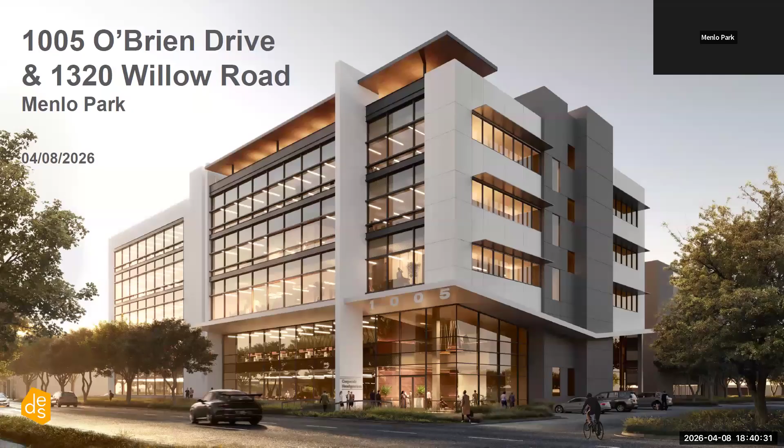Okay, next is item E2, receive an update and provide feedback on the draft Environmental Impact Report, EIR, for the 1005 O'Brien Drive and 1320 Willow Road development project. The applicant will present. For the record, there are two corrections to be made in the staff report: one, there are no bike facilities along O'Brien, and two, there will be 48 long-term bicycle parking instead of 38.

Sorry, does that mean in the plan? In the plan that there are no bike facilities? I know, but I'm sorry, can you repeat? So in the plan it shows 38 long-term bicycle parking, but there will be 48. It's planned for 48. To clarify, right now it's identified in the EIR as part of the staff report that there is, as background, bike facility on O'Brien, and that's a misprint. So there are no existing bicycle facilities. That's what I'm asking. So item one, is that existing, okay? That's item one, right? Correct, that there are none, and item two says the plan is for 48.

Thanks for clarifying. So the applicant will present.

And with me tonight are Dawn, Lauren, and Kenny with DES Architects. And on the phone or by Zoom, we have Elizabeth with Kimley Horn to answer your questions. We're excited to bring this project to you. And as an avid cyclist, I want to thank you for all of your work helping to make our streets more complete. With that, I'll turn it over to Dawn with DES.

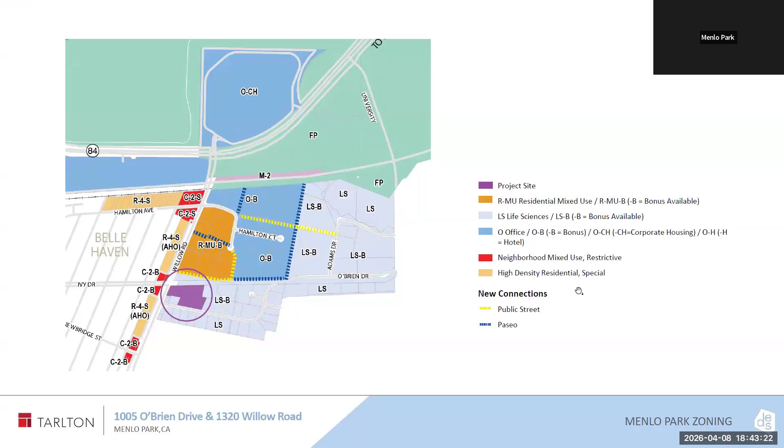There are 3 existing low-rise industrial buildings on the project, on the site right now, and 3 separate parcels.

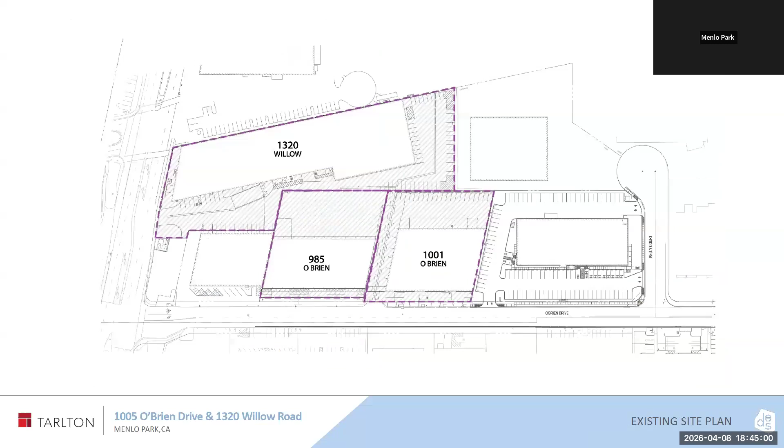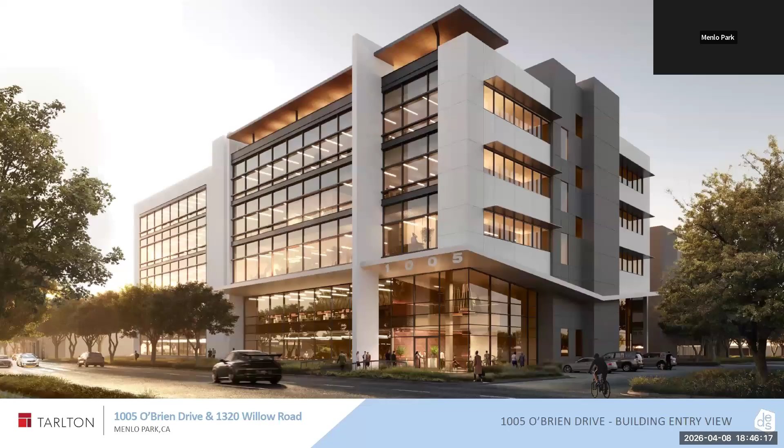So this is a view of the 1005 O'Brien project. You can see it's transformational in terms of the streetscape. We've got lobbies fronting the street with generous entry plazas, and then a nicely landscaped frontage with new pedestrian and bicycle facilities. If we go to the next slide, you can see in more detail in plan what I just described.

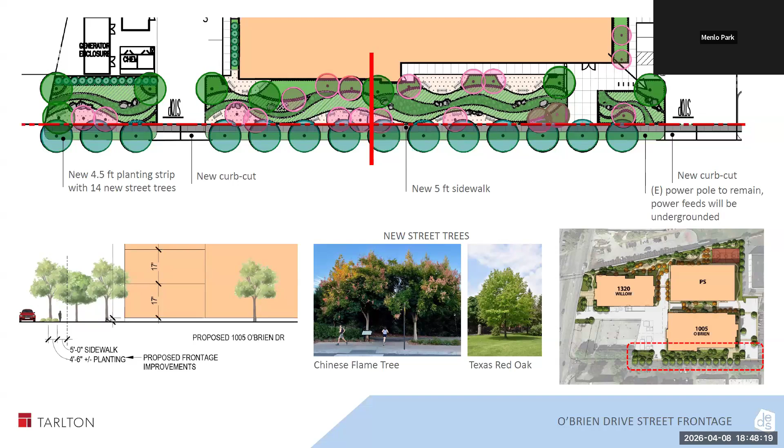So then the next slide, we have a plan. So you can kind of see that in plan. On the right-hand side you'll see the entry drive, and then at the corner you see the entry plaza, and then the generous landscape frontage, which is between 26 and 30 feet setback from the property line. We're showing a 5-foot bike lane, a class 2 bike lane with 3-foot stripe separation along the street. We've got a 4.5-foot planting strip and a 5-foot sidewalk facility. The power poles will remain along the street, but the power from the poles is undergrounded to the building. They do serve the project across the street as well, so the poles have to remain. And then we have a couple of different tree species there for more interest, really significantly trying to improve the pedestrian experience along the frontage.

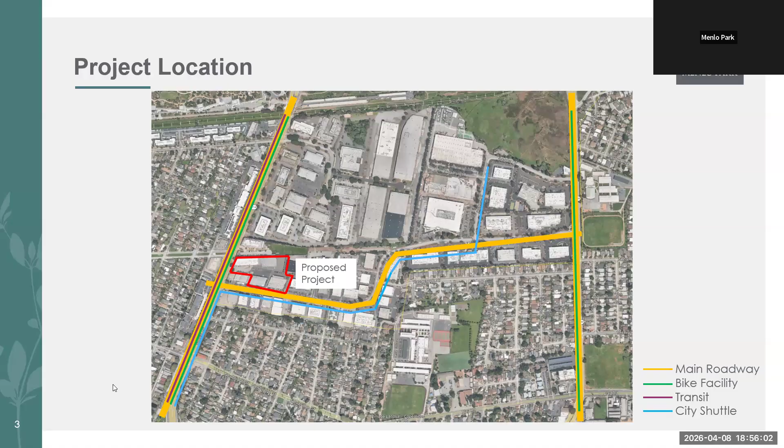The project will involve demolishing 3 existing buildings and constructing 2 new R&D buildings and a new parking garage. Open space will be scattered around the project site, and again there will be both long-term and short-term bicycle parking provided.

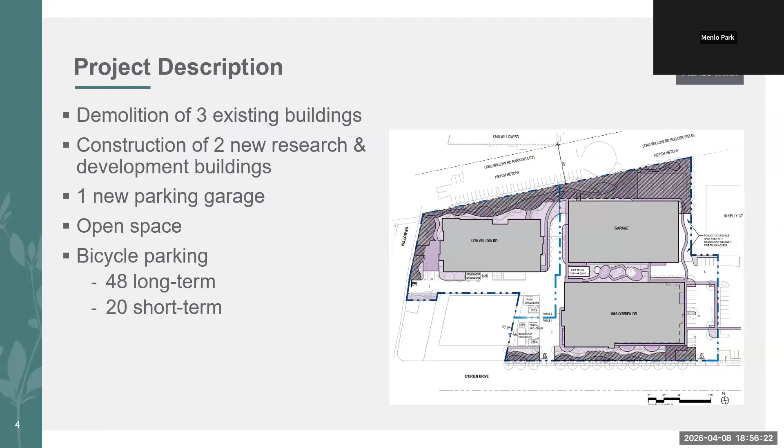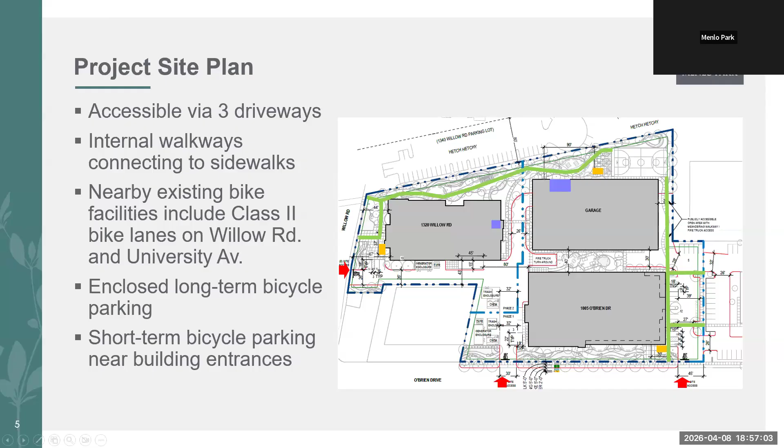The site will be accessible through 3 main driveways, 1 on Willow Road and 2 on O'Brien Drive, shown in red arrows. There will also be internal walkways that connect to the sidewalks on Willow Road, as well as new sidewalks on O'Brien Drive, with some internal walkways shown in green. There will also be 2 enclosed long-term bicycle parking areas shown in purple, and 3 short-term bicycle parking areas in yellow, located near the entrances of the buildings.

Since the implementation of SB 743 in 2020, vehicle miles traveled is now the standard for CEQA transportation analysis. So that is looking at the total amount of driving that a project could generate. And CEQA analysis also assesses impacts looking at transit, pedestrian, and bicycle travel as well. And while it is not a CEQA requirement, this project also evaluated the level of service just for informational purposes.

The project is estimated to generate 19 vehicle miles traveled per employee, which is over the regional average of 15.9. The city's threshold is 15% below the regional average, which is 13.6, meaning the project is exceeding the city's threshold by 28.4%.

In addition, C/CAG requires a 35% trip reduction for a project that generates over 100 daily vehicle trips. So in summary, the project will require mitigation under CEQA, and it needs to reduce trips by at least 35% to be in compliance with city as well as C/CAG requirements.

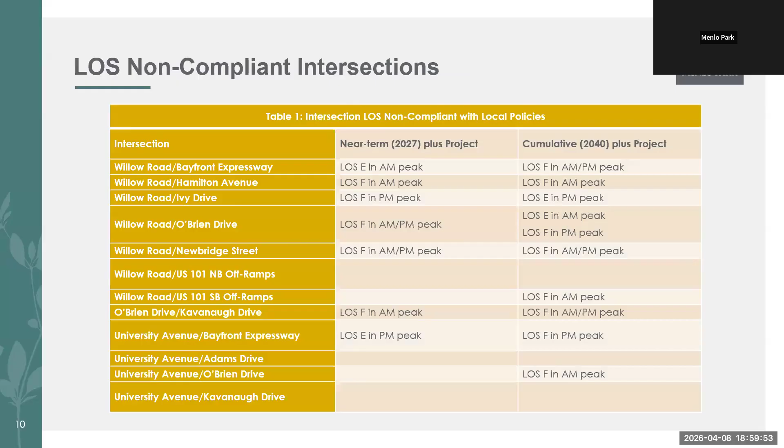We're currently in the draft EIR 40-day review period, which ends on May 18th. The Planning Commission public hearing is scheduled for May 4th. Written comments must be submitted no later than 5:30 on May 18th. A summary of recommendations today will be included in the staff report to the Planning Commission. After completing the pilot as directed by City Council, the process will also be provided to Council as an informational item.

This concludes our presentation, and we can answer any questions you have.

Okay, so now we can take clarifying commission questions. Who wants to start? Go. I did have a few.

Can you help us understand how many people work in the existing 3 buildings on the site, and how many people are projected to work in the buildings you are planning to build?

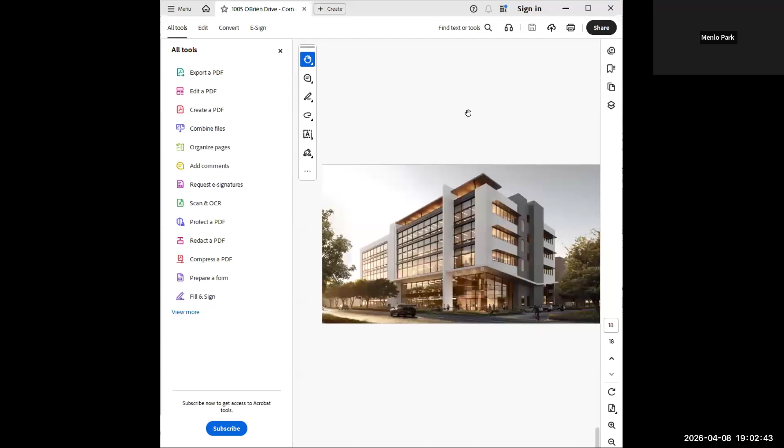Just a sec, sorry. I think you said that the 6.5 level parking garage had 194 spaces. Is that what you said? Pardon? I'm sorry, something like that, or it was just a ballpark. I'm just trying to understand.

I just wanted to make sure there were no surface parking stalls before I give you the number. I think it's 520 spaces, let me get to that page.

I may be able to answer that. When the parking garage is complete, there'd be 497 spaces, and then there are 23 surface parking spots, so total for the site at 520. Thank you very much for that.

And we were phasing the garage, so we're not going to overbuild it by phase. We would build what we needed for the first building and then add to the garage for the second building. Oh, I see, that's interesting. Okay, thanks for clarifying that.

A few more clarifying questions. I know in the staff report it was discussing the total square footage of the whole site, and I think over 30,000 square feet was public space. I think if this is actually perfect, thank you for putting the slide up. I have some confusion around what the public space is.

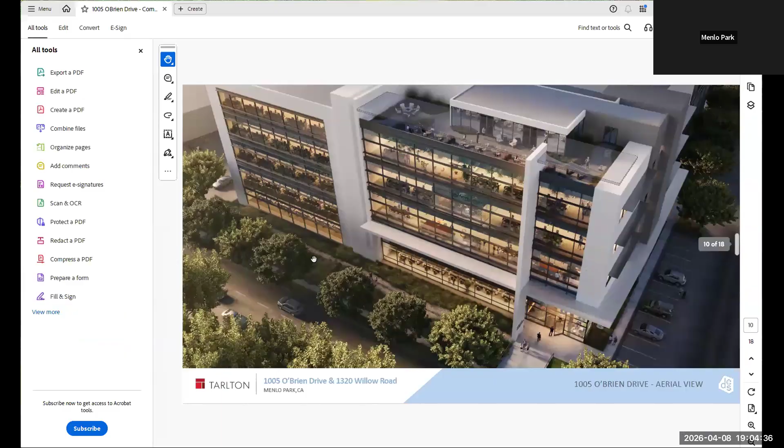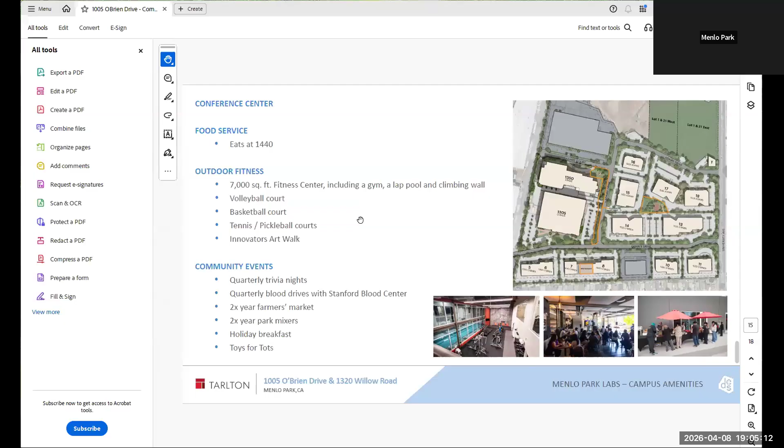Through the chair, I can answer this one as well. I have the plans in front of me. So as part of the LS zoning district, a portion of the site is required to be open space, and then a portion of that is required to be publicly accessible open space, meaning anybody in the public can use it. There end up being public access easements over that land. So the majority of the publicly accessible open space is...

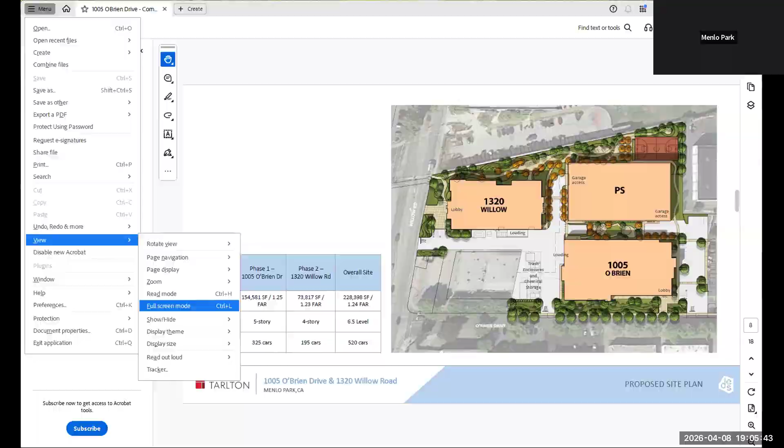...along Willow Road. You see at the north side, there's that meandering path, you can kind of see at the top here. The majority of that will be publicly accessible all the way over to the sports court from Willow Road. And then there's a little bit of publicly accessible open space along O'Brien Drive.

Okay, this is an adjacent clarifying question. To clarify around the existing state of the bike ped infrastructure and what it will be post-project: on the Willow side, there is a sidewalk and a Class 2 bike lane, and that remains the same, correct?

On the O'Brien side, there's currently no sidewalk — just a curb and then a paved surface all the way to the building. There's no defined sidewalk at the moment, and a sidewalk will be installed.

And then there's no bike striping or any sort of bike lane there, but it will be added. Yeah, there is adequate street width to add the bicycle lane, which would be the 5 feet plus the 3 feet of hatched separation — so it's striping with a 3 feet addition, not protected.

Got you, like on Santa Cruz. Yep. So to note, we would like to look at O'Brien more comprehensively. It is unlikely that this project itself during construction is going to bring on bike lanes, because then it would be piecemeal. There could likely be a bigger conversation on how to bring that facility along O'Brien, not just specific to this project.

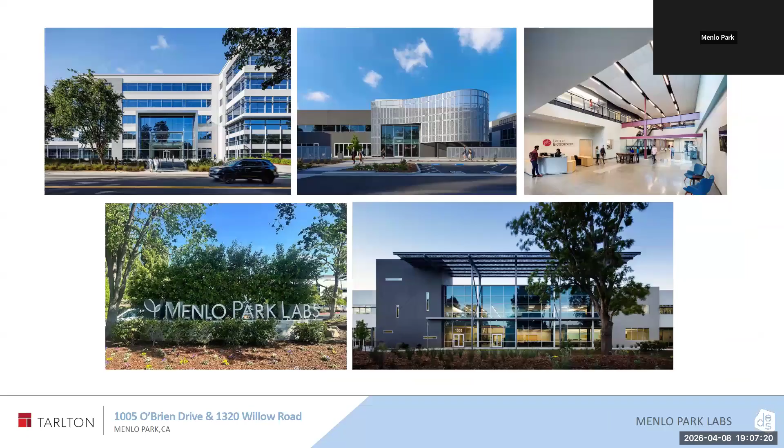I see, thank you for clarifying that. So currently, to the right of what we're seeing, because the campus extends, there aren't bike lanes on O'Brien at all, right now.

Okay, if we just look at the plan for a second — can we go back to the overall site plan. So the portion of open space along the top of the parking garage at 1320 Willow, where the sport courts are, that's the publicly accessible open space. The pieces that weave through between the buildings are not dedicated to the public.

A final clarifying question on exactly that portion of the site — what is that there? Is that a road between your site and what's above it on the slide? I believe that's Hetch Hetchy, where that goes across the top. So that is a parking area off-site from us.

Okay, but can someone drive down that? Is that a road? No, it's not a road — it's Mid-Penn High School's car park. Okay, I'm just trying to understand that. Thank you, I'll just see if I've got any other questions there.

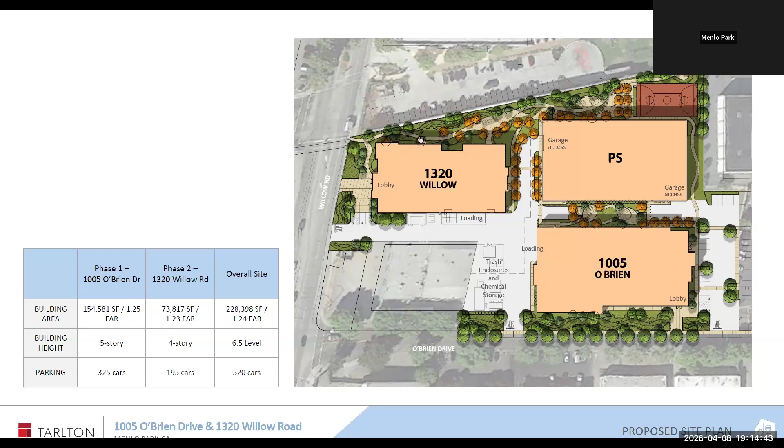I think that's really all I had. Okay, I have a couple of clarifying questions. I'm trying to sort these into clarifying versus feedback. On this slide, there's a walking path on the top part of the site, which I think, when you showed the map of bike access facilities, one of them was in the parking garage. I could imagine as a cyclist it might be nice to bike up Willow, since it has the protected bike lane as far as possible, and then take this walking path across.

So will that be accessible to bikes? Right now we're showing about a 5-foot wide path there, but that's something we could definitely consider.

And then the other question I have is about the e-bike share. I know the range is somewhat limited for that e-bike share. I think it's limited basically to the campus itself. Is that true? I don't think so. Okay, because I tried to take it to that Starbucks and it was out of range. So help me understand the issue, because this is very interesting to me and disturbing. The purpose of these bikes is to get to the Starbucks and back. So if it doesn't work, I will double check that.

But it's possible that it's not working properly, right? I have my own bike, so I don't take the shared bikes, I don't know. I tried, I just looked at the map, so I might not have looked carefully enough. But I just wanted to mention it.

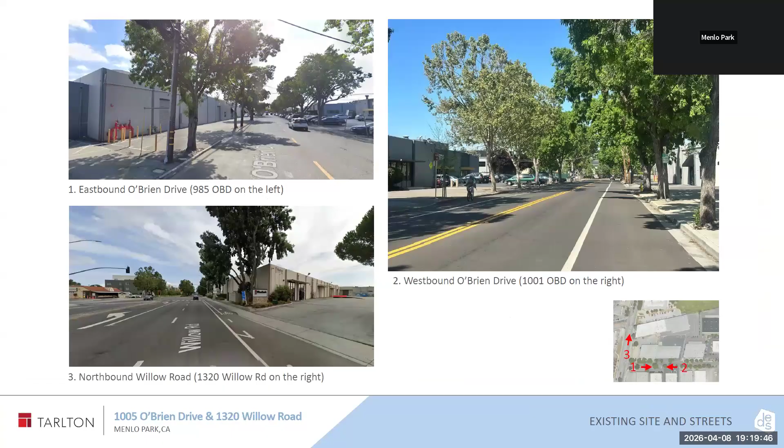And finally, in the staff report it talks about sidewalk gaps. If you go to the master plan map, the buildings in the cream color are Tarlton Properties. Everything grayed out is not. Oh, I see, yeah. Oh, thank you, that's helpful.

Thank you very much. Sorry, sidewalk gaps were referred to - there was a comment in the staff report about sidewalk gaps existing on both the eastern and western portions of O'Brien. So the tense of it is confusing to me. Would the sidewalk gaps exist after the project's completed, or do they exist now? That's confusing to me in the staff report. I can just read it quickly: it says sidewalks are present along the eastern portion of O'Brien Drive. However, sidewalk gaps exist on both the eastern and western portions of O'Brien Drive, including a segment directly along the project boundary and along Adams Drive.

So when the projects are redeveloped, the sidewalk is added. So there are gaps between - you go from a sidewalk that's been redeveloped with a project to the situation we're showing you where it's just a paved surface from curb to building, and it's vehicular, it's pedestrian, it's whatever. So yes, as the projects are proposed and built, the sidewalk is added, but because it's not contiguous, you're going from a true sidewalk to a paved off-street area. That's helpful, thank you. That makes sense now. Thank you very much.

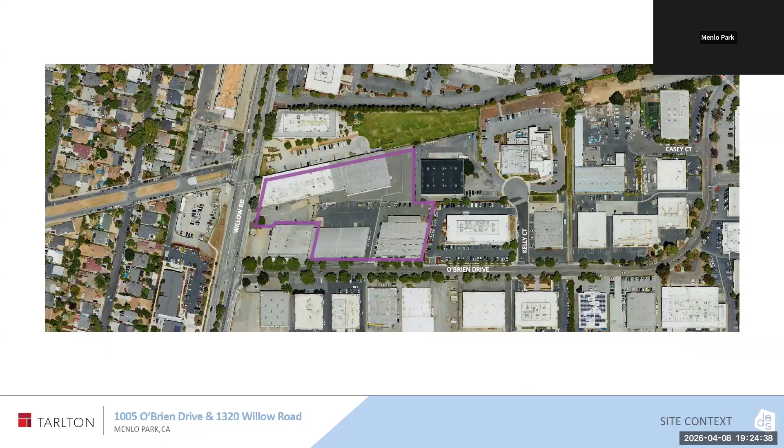Sorry, to clarify, you mean along O'Brien? Just wherever there is a bike lane proposed here, it's all class 2. It seems like not fully protected class 4. Is that right? If you are referring to the existing class 2s along Willow Road and University Avenue, they're existing.

But can the project team tell me what was the thinking process for the bike lanes here, and why is there no protection? We've shown the intent of providing bicycle facilities. I think the challenge is that there's a broader study happening for the whole street. It doesn't make sense for us to just do a small piece in front of our project that's not connected to a broader network on O'Brien Drive. So we're showing the intent of providing bicycle facilities, and we're willing to work with the city to figure out what is the best solution. But we didn't want to show nothing on the street because we do need to provide something.

I think we need to work with city staff to figure out what the best solution is and implement that. I would say even if nothing happens in the rest of O'Brien, there's benefit to having bollard protection at intersections, and that intersection is now going to become more heavily trafficked. So by all means, I'm all for continuity with the rest of the street. I didn't know that University was kind of used as a back connection to that area, but I would say the cyclist improvements here really need more consideration, regardless of what the city does.

The city's standard is not to put in protections, and it has not done that even on safe routes to schools. Physical protection is generally class 4. So I would say, given the amount of traffic and the failing intersections, like the VMT failing intersections, I would push for that.

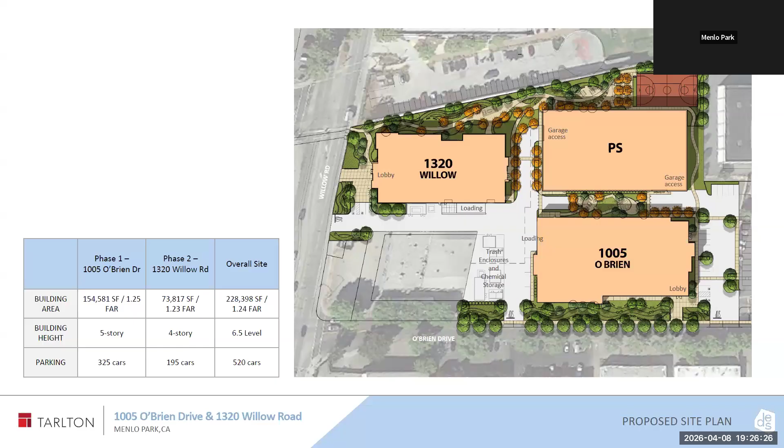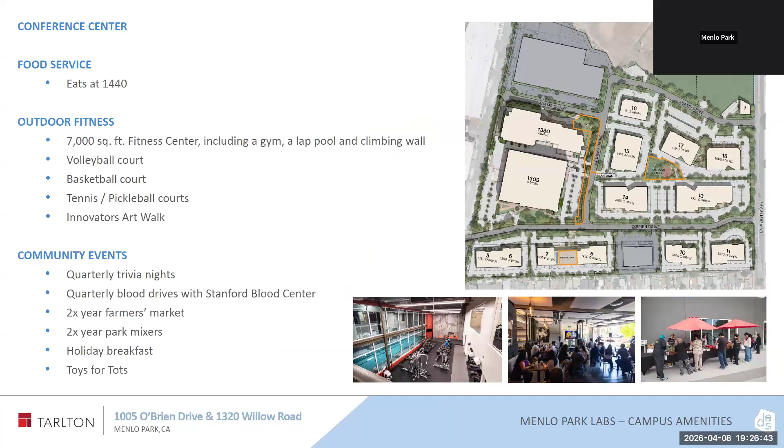Next question is about the Hetch Hetchy right-of-way. In some of the drawings I saw the easement was marked, but in other parts of the drawings and the report it was just marked as Hetch Hetchy. It seems like there's a real opportunity for building a connected trail — this image doesn't show Ivy, but Ivy has Hetch Hetchy underneath it on the other side of Willow. I would love to hear more thinking about the coordination with SFPUC and their real estate group, but also access for the public.

I know there's that parking lot for the high school, but what is the plan for interconnection with the easement there? Could we create an opportunity for a really nice connector, maybe with some coordination with the high school to carve out some of their parking for a trail? We're happy to study that. We haven't at this point, we've just provided the amenities on site, but if that's something we need to look at, we're happy to do that.

Next is about construction impacts. There's 2-phase construction over multiple years on this corridor with school traffic and the shuttle stop. Does the EIR's construction management plan include specific provisions for maintaining safe pedestrian and bicycle access during construction, for example not closing the new sidewalk during phase 2? I need to review that, I don't have the answer, but obviously that's something we'd want to consider. We want to maintain full access for pedestrians and cyclists while construction is happening. Construction sites in the city are some of the most dangerous for access. We have a good amount of setback on the project, in the frontage, to allow for construction to occur, so we'll be mindful of maintaining pedestrian and bicycle facilities while that's happening.

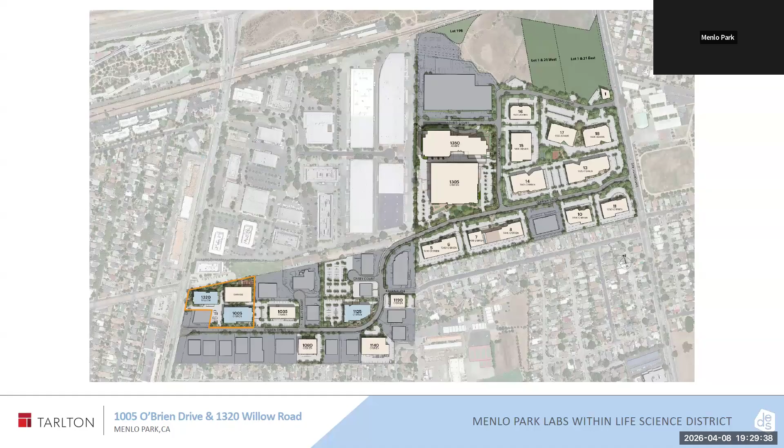My last question is about bike parking. I understand the staff report says 20 short-term spaces, the project data sheet says 9 were required, the site plan shows 10 were provided. I think I heard Athena say 20 is the actual number and it was a typo. All those numbers seem very low to me, given the emphasis on cycling on this campus and the support from the landlord. I'd put some more thought into the analysis, whether it's 10 or 20, for a parking lot with 500 plus spaces, that seems proportionally very low if we're building new facilities in this area with e-bike charging, etc.

For a life sciences center, that's 5-day-a-week work, so that's a lot of people coming in and out. Whether there's parking or not, this commission has studied whether you can induce demand for cycling, and not having parking is very frustrating for people. It seems like a pretty low cost way of potentially hitting your 36% target. Happy to look at that. We base the numbers on CALGreen and the city's requirements, so we can go back and look at that.

Thank you, I have a question about bicycle long-term storage. Do you mean bike lockers and things like that? Usually we have a large caged area within the parking garage, with limited access for cyclists, with racks within that area. We also have some bicycle parking close to the stair enclosures within the building at 1320. Are those both long-term, or do you distinguish between short-term and long-term? Short term is the rack by the front door of the building, outside. The long-term parking is undercover, so it's inside either the garage or the buildings. Okay, thank you.

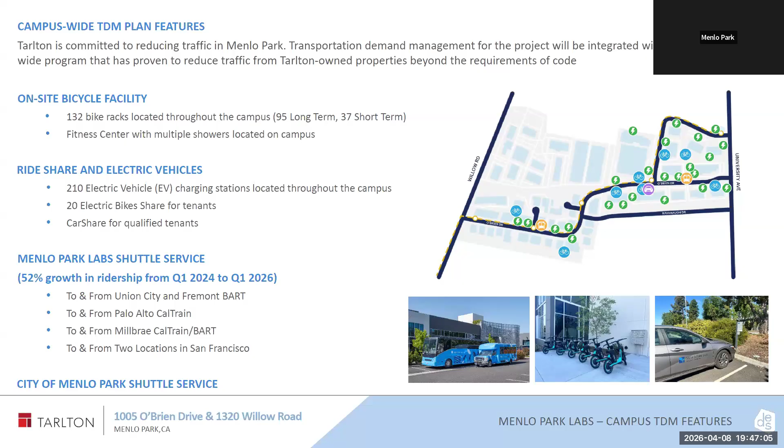Katrine, maybe it is on the slide. So the project is generating VMT of 19 vehicle miles traveled. That's correct. The city's threshold is 15% below the region's average, which is 13.6. So 19 is more than 13.6, and that's why the project is generating more VMT.

No, I don't know if that's explaining it for me. I think what I'm trying to say is, I see that it's higher than it should be, but why is that? Is it because the ratio of people using cars, because they're traveling long distances to get there?

So it comes from how VMT is usually calculated. Typically we take trip generation estimates from the ITE trip generation manual, which provides the typical number of trips a type of land use would generate, then we put that through a regional travel demand model, and that's the number you see, the 19 vehicle miles traveled. Potentially you're thinking the 19 miles was calculated in a more specific way, like looking at specific employees and how they travel, but that's usually unknown when the building isn't occupied yet. So the calculation comes from a more holistic, larger perspective. Okay.

I think we typically start from a place that's a little higher. With the TDM measures applied, we're down to 11.6. Yes, I did see that.

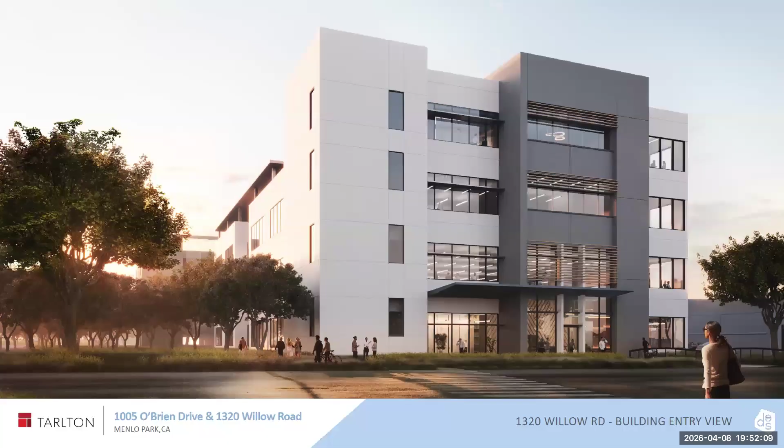You have so many Tarlton properties along that section, and I'm just imagining a world where they could be separated from cars that way. That's it.

I appreciate that you talk about your buildings as a campus. I used to work at Google, and it definitely had a campus feeling — they worked hard at making us feel like you could get on a bike anywhere on campus and safely get to your location. There was a very consistent feeling around the bike and pedestrian experience.

It was definitely protected. I'm sure they were fortunate to design it from scratch, but it was a really good experience.

So the only other thing I wanted to ask about: the analysis identified 11 measures to improve intersection operations relative to pre-project conditions. We talk about Willow a lot on this commission, and it's a little scary to think that level of service at these intersections could worsen, especially with increasing vehicle delay, because we certainly hear a lot of feedback about backup there. I know, Joanna, you mentioned that you confirmed the staff report says the measures were considered infeasible, but then what's the action? Just to clarify, can you help me out? After this goes in, if level of service and vehicle delay worsen at the intersections, what happens then?

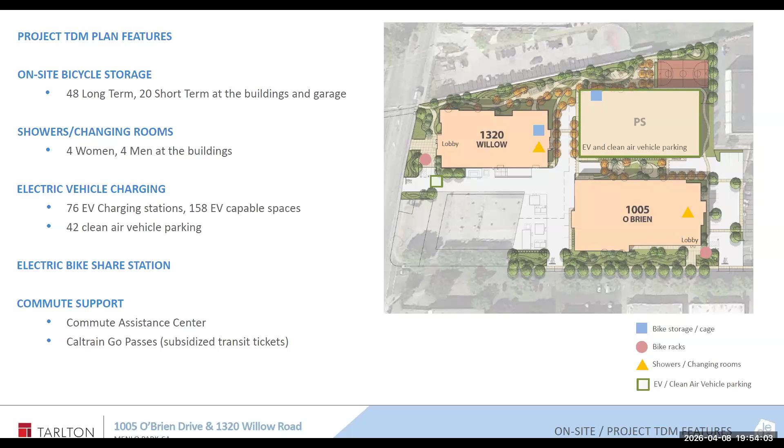They look for one of those transportation demand options. I'm trying to look at the table you were referring to. So the fact is, the majority of the Willow Road intersections are already at... let me rephrase. The level of service ranges A through F. Typically A through D are generally acceptable, and at levels E and F is when you start feeling those congested intersections. So at these intersections, they are already at that level. It's making it a little bit worse, but essentially it's not something we can currently change.

So it doesn't look like we're going to change it by 2040 either. This was a bit of a shock to me, honestly, because I know we're aware it's difficult, but at the same time we are asking people to commute to these places, and we expect 520 of them to fill the parking spaces. Clearly people are going to be commuting by car, not just to these two buildings owned by the developer, but also others, and I'm certain other developers will have buildings coming up. This is wonderful to see, development in this area and employment, but I don't know if it's insignificant or a slight increase, because when you take it in aggregate with all the other developments that might be going on, this could be pretty scary. Willow could just turn into a complete parking lot.

Unfortunately, Willow Road is one of our major thoroughfares through the city and through the region. The intersections are operating at what it is during the peak AM and PM hours, which is congested, and we're really looking at relieving that. We will have to look at very significant changes, like roadway widening, which I'm sure requires a much bigger conversation.

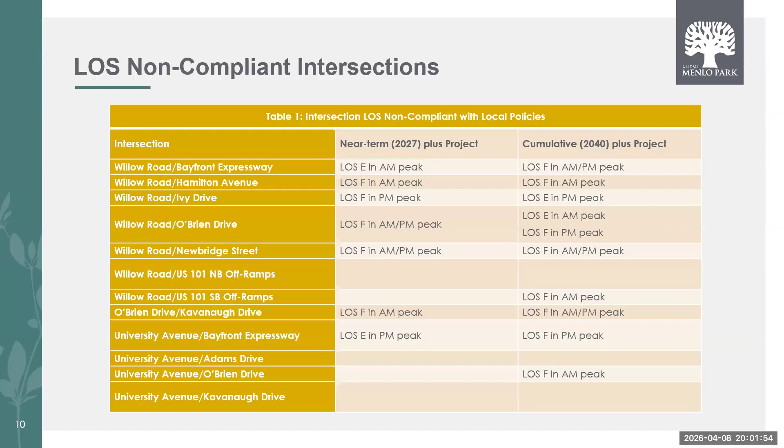I understood from the staff report that the purpose of this meeting is to provide feedback, which we have, but we're not making a motion or anything like that. As you said, when this goes to council there'll be a summary in the staff report about the planning commission's feedback. So how will that work? Will there be a description of what we discussed, or just a description of the process, like this came before the commission and they gave feedback to staff and the developer, period? If we want the actual content of our feedback known to council, do we have to make individual remarks as commissioners to the council?

If you would like to make a collective comment on the project, we are documenting this feedback today, and it will be in the staff report to the city council. I see, so when we report to council, there will be a reference specific to the planning commission's feedback from today. Okay.

Okay, I have a couple of somewhat specific feedback items, I guess. My first comment is to the city, which is, we have a developer here who's really excited to help commit to making bike, transit, and pedestrian improvements and easing the car burden of this area.

We should really think about how, as a city, we maximize the opportunity to maybe remove parking and put in a protected bike lane on O'Brien. Fun fact, I bike over the Willow Overpass and on O'Brien, and the Willow Overpass is not the scariest part of my commute—it's O'Brien. I feel somewhat intimidated sometimes by UPS trucks driving by very quickly. So that would be my comment to the city, to really think about how we can make the most of this opportunity.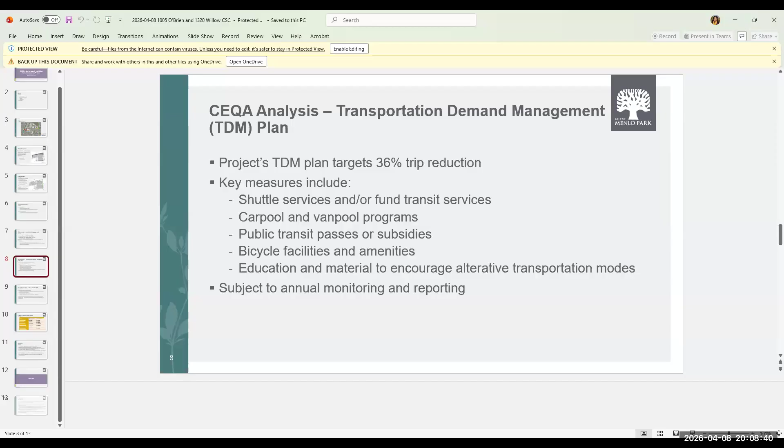Thank you for the presentation. I don't really have any comments that are significantly different than my fellow commissioners. I just want to reiterate that the allocation of the bike storage is just not nearly enough for the types of mitigations that we want to see. We want to see less cars, more bikes. And again, anything we can do in this area to make it easier for the person who's reluctant to use bike transportation because they don't feel safe on the streets - protected bike lanes seem like an easy fix for that. They're certainly a step along the way. So doing that on O'Brien seems like a no-brainer. That's about it. Thank you.

I do have one comment. I know a lot of people have mentioned up here the number of bike parking spaces being low.

I think the number of bike parking spaces in the garage won't account for potential additional bike storage provided by tenants. My company has a bike storage room that's locked and only accessible to certain employees, so my gut reaction is that number seemed low. In a multi-tenant scenario, we'd rely on what the landlord provides, but a large single tenant would likely add more within the building. So we can look at it both ways to make sure we have the right amount of bike parking.

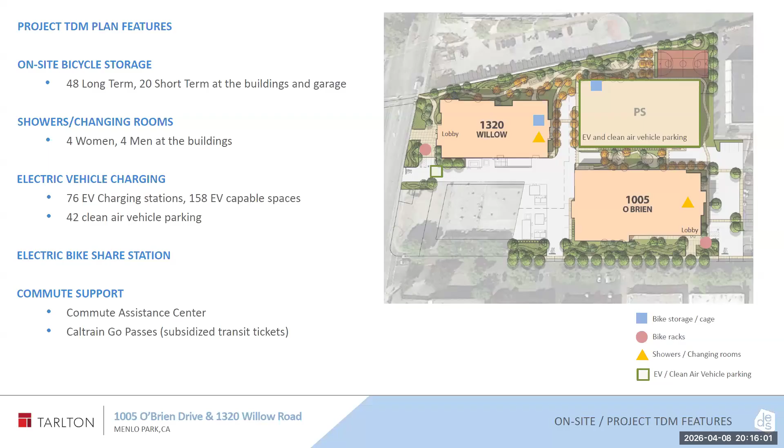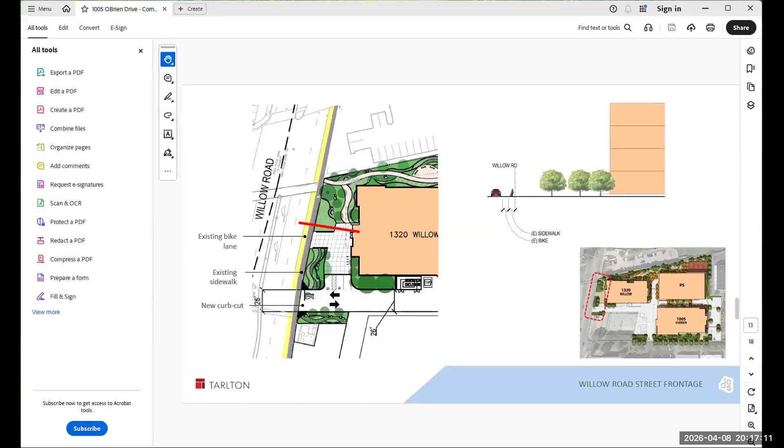Just to jump in here with a quick plug on those important dates: the Planning Commission official hearing on the EIR will be May 4th, and the closure of the EIR comment period is May 18th, that's a Monday. All of this information is on the project page. If you go to the planning division section of the website, go to projects under review, it has all the current status, all the EIR, all the appendices, and the next steps. But May 4th is the Planning Commission hearing.

I would encourage you, if you have comments on the EIR specifically, like those VMT type questions, give your comment at the hearing or provide written comment, which you can email to me at crturner@menlopark.gov, my name is on the website. That will all be included in the final EIR response to comments. All of the comments need to be addressed in some way in that final document before the EIR is certified, and then the project ultimately acted on by the Planning Commission at a future date.

And when you're on the website of the city looking for a planning project, are you looking at it based on its address? Yes, it is listed under 1005 O'Brien / 1320 Willow.

Thank you to everyone for answering all of our questions and hearing our feedback. Looking forward to this project.